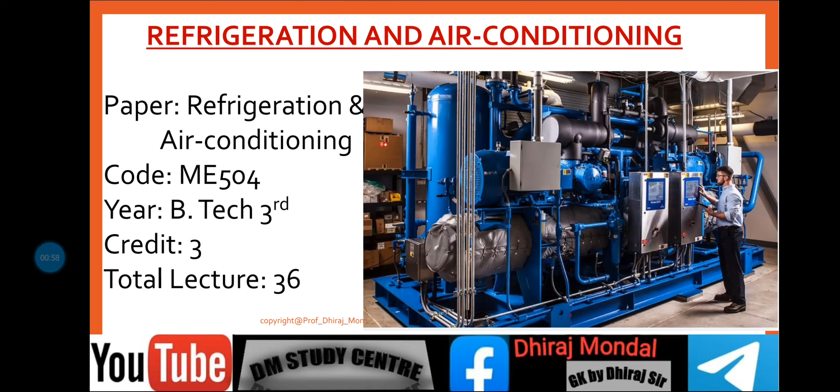This subject, refrigeration and air conditioning, is dedicated for 5th semester third year students, credit 3, lecture 36. Today we will be discussing the numerical on VCRS.

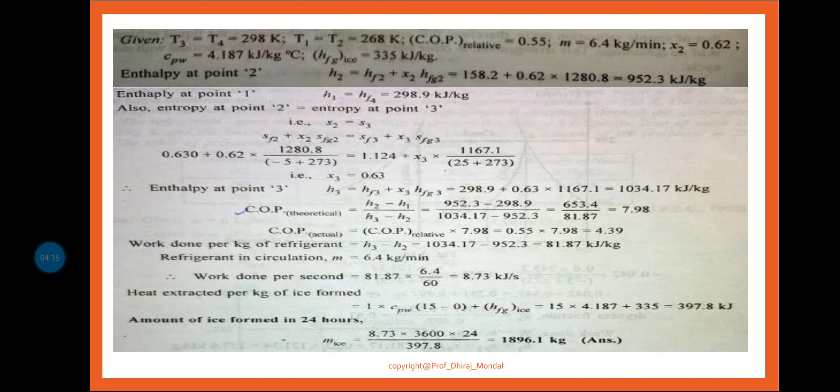Let us start with problem number 3.2. Last class I discussed this problem where we had to calculate the mass flow rate, mass of ice formed in 24 hours, which is 1896.1 kg. If it is not clear, simply see this numerical, it will be clear. First of all, go through the problem.

Determine the theoretical COP for a CO2 machine working between the temperature range of 25 degree and minus 5 degree centigrade. Dryness fraction of the CO2 gas during the suction stroke is 0.6, that is, at the outlet of the evaporator, the dryness fraction is given. The following properties you can see.

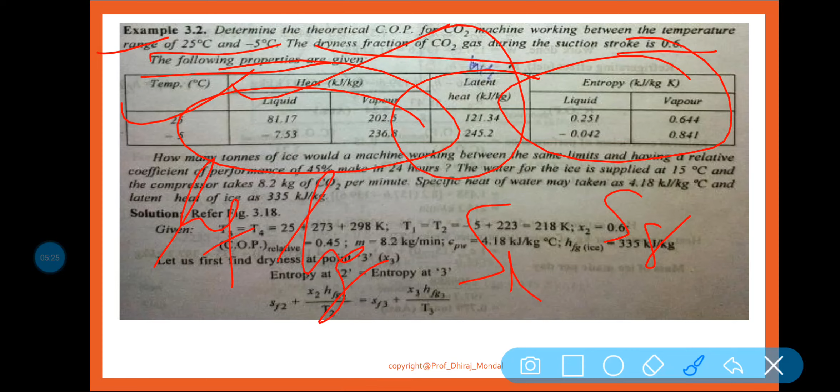So you can easily find out what you need - how many tons of ice would a machine working under the same limit and having a relative coefficient of performance of 45% make in 24 hours.

The water for the ice is supplied at 15 degrees centigrade and the compressor takes 8.2 kg of CO2 per minute. Specific heat of the water may be taken as 4.18 kilojoule per kg Kelvin, and the latent heat of the ice as 335 kilojoule per kg.

So referring to figure 3.18, here the temperature and pressure limits are given, and this point x2 is given, x2 is equal to 0.6. You need to find out x3. Let us see.

First of all, the temperature T3 and T4 are given, because T3 is equal to T4, so it is equal to 298. T1 is equal to T2, x2 is given, relative COP given, mass is given 8.2 kg per minute, CPW means specific heat at constant pressure of water, and enthalpy is given also, enthalpy of the latent heat of the ice is given.

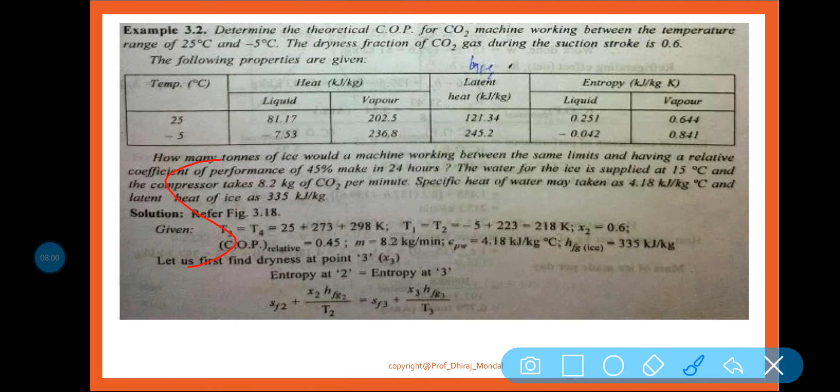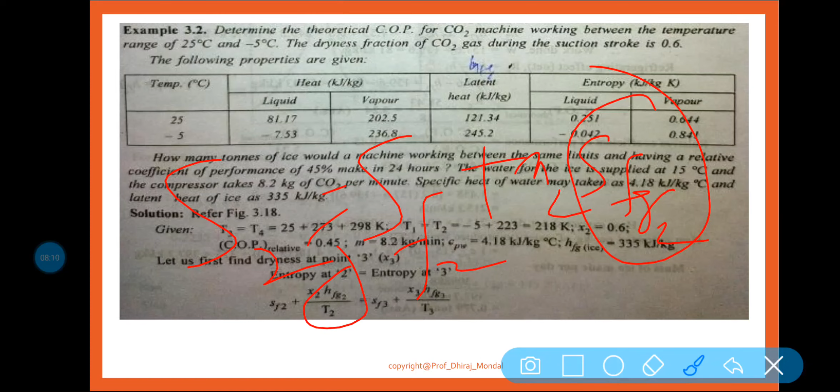Now S2 is equal to what? SF2 plus X2 into SFG2, because we know that S2 is equal to SF2 plus X2 into SFG2. So this SFG2 can be written as HFG2 by temperature T2, and similarly S3 you can write like this.

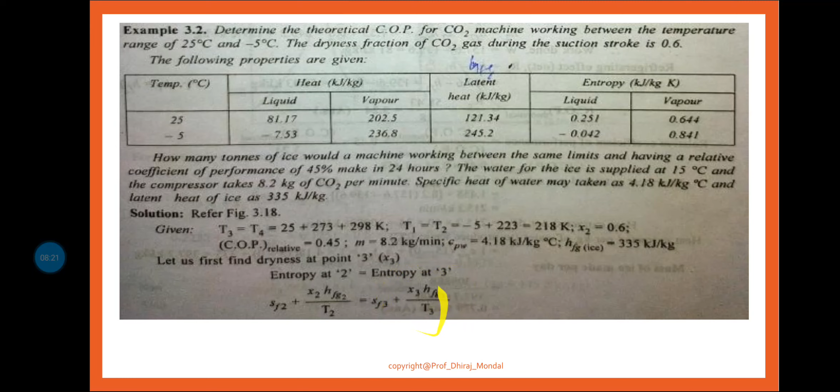So all the values are known, only X3 is unknown here, and the rest you can easily find from the table. Remember, this is your SF3, X2, HFG3, HFG2 and temperature. Only X3 is unknown, the rest is known. So X3 you can find, the dryness fraction is 0.63.

Now what is the work done in this portion? Work done is equal to H3 minus H2 per kg. So H3 is equal to HF3 plus X3 into HFG3, that means up to this mass plus this mass. So put all the values to find H3. HF3 is given in the table, X3 already we have got, HFG3 already given in the table. So from this equation you can easily find H3.

H2, how can we find H2? H2 is equal to HF2, plus X2 into HFG2, like this. So put all the values, you will be getting H2. Now you can easily find the work done. This work done I have got is 81 kilojoule per kg.

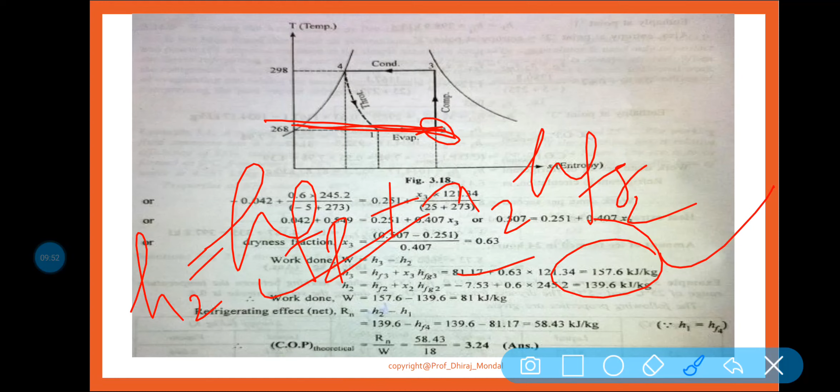Now refrigeration effect is equal to what? This is your refrigeration effect. Rn is equal to H2 minus H1, refrigeration effect per kg. So H2 you know, H1 you know. H1 is equal to HF4, because it is your throttling process, so H1 is equal to HF4. Put all the values, you will be getting the refrigeration effect.

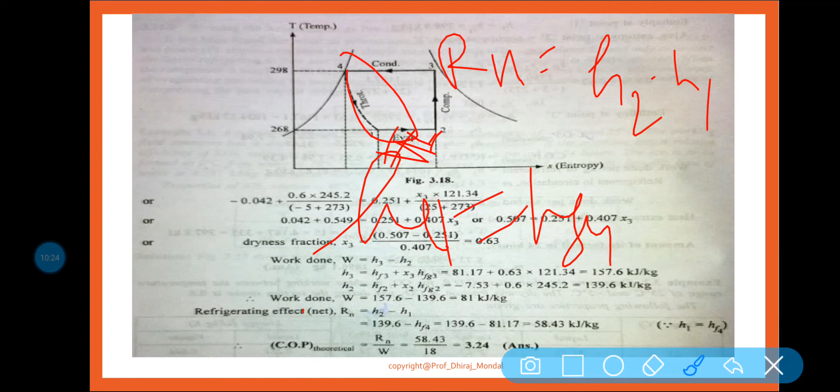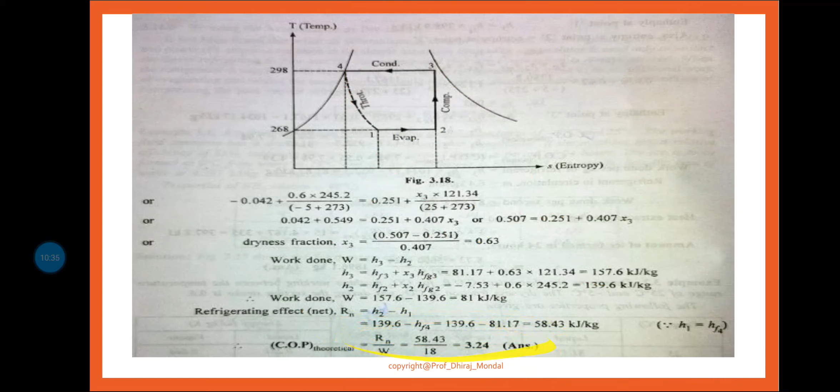So what is the COP? Refrigeration effect by work input. If you put the value, you will get theoretical COP equal to 3.24. Clear? Now we know there is a relation: relative COP is equal to actual COP by theoretical COP.

Relative COP is given as 0.45. Relative COP already I have, theoretical COP already have got, so I can find out the actual COP. So 1.458 is the actual COP.

Next, how to find the heat extracted per minute. COP is equal to refrigeration effect or heat extracted by work done. So heat extracted per minute is equal to actual COP into the work done in the compressor, and it is equal to mass flow rate into enthalpy difference, MCP delta T.

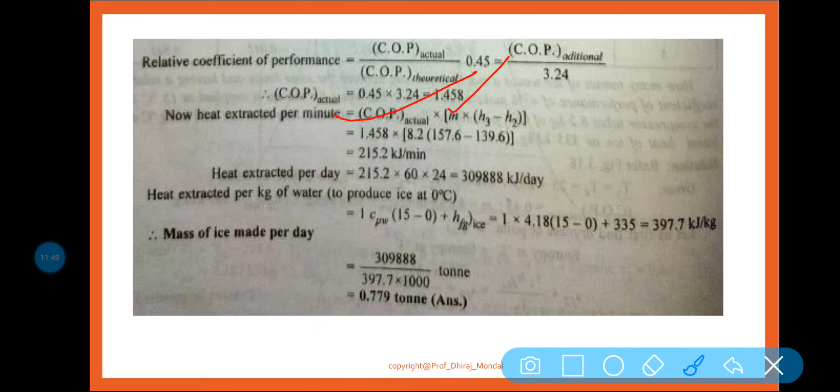Work done is equal to H3 minus H2 into mass. So heat extracted per minute equals actual COP, that is 1.458, into mass flow rate, giving the result in kilojoule per minute, with mass in kg per minute and enthalpy in kilojoule per kg. So ultimately you get the heat extracted per minute, which is 215.2 kilojoule per minute.

Next, heat extracted per day. If you have got per minute, then you can convert it in terms of hour, multiply into 60 into 24, so that you will be getting in terms of per day. So 309,888 kilojoule per day heat extracted per day.

Now you know that from 15 degree centigrade water to 0 degree centigrade ice, if you want to form, then you need to first reduce the sensible heat from 15 to 0, then you need to extract the latent heat, so that it will be converted into ice. So MCP delta T, that means the water is 15 degrees Celsius, MCP delta T plus HFG.

So this is the heat extracted per kg. Heat extracted per kg is 397.7 kilojoule per kg. Now total heat extracted per day is this, and this is your kilojoule per day, this is your kilojoule per kg.

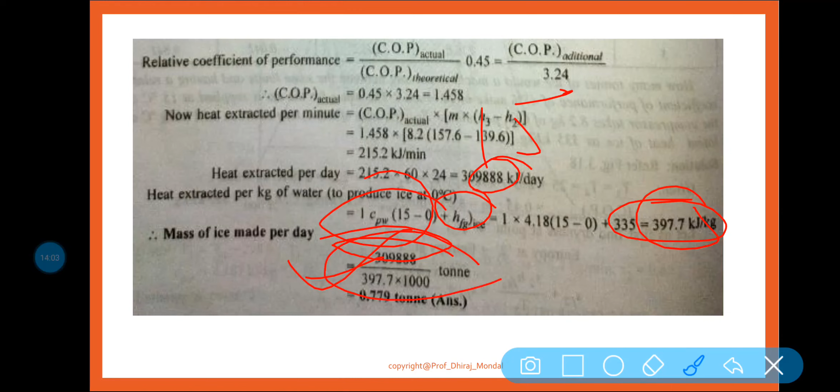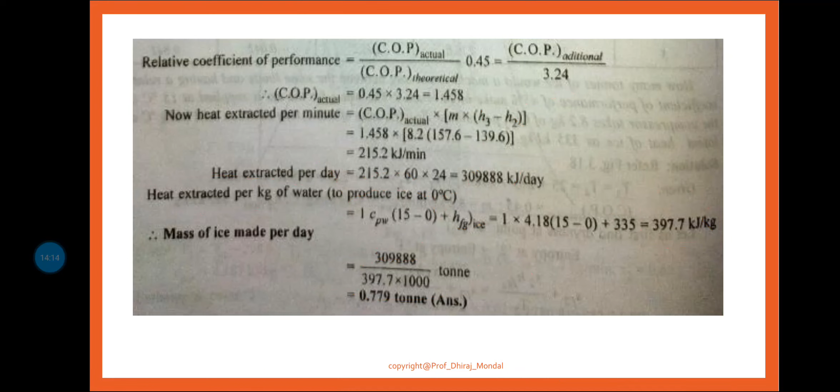Now if you want to make it in terms of ton, then multiply with this, that means divide in terms of ton here. So 397 into 1000 ton, so this is your 0.779 ton mass of ice made per day, because the latent heat or the heat extracted per kg of water is 397.7. Now if you want to convert it in terms of ton, then total what we have got in 24 hours is 309,888 kilojoule per day, and here it is your extracted per kg. So ultimately if you are putting all the units together, you will be getting this much amount of ton. So 0.779 is the correct answer, this is the mass of the ice made per day.

In case if you want to calculate one more problem, let us see this problem 3.3. This problem came in the UPSC 1992. Very important problem. A refrigeration system, you can see, one minute.

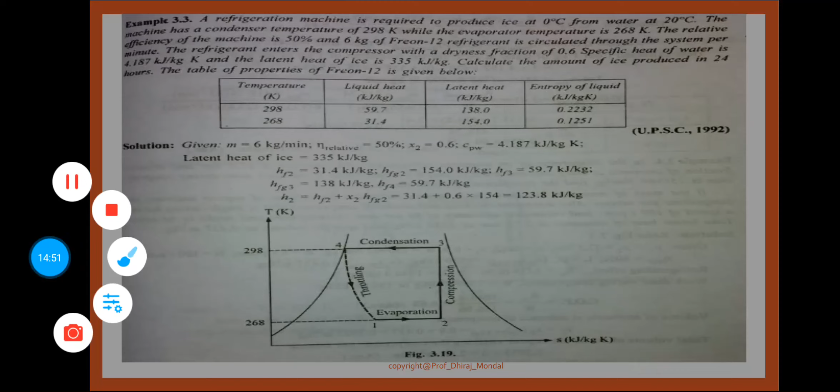Refrigeration machine is required to produce ice at 0 degree centigrade from water at 20 degree centigrade. The machine has a condenser temperature of 298 Kelvin while the evaporator temperature is 268 Kelvin. The relative efficiency of the machine is 50%.

6 kg of Freon 12 refrigerant is circulated through the system per minute. The refrigerant enters the compressor with a dryness fraction of 0.6. Specific heat of water is 4.187 kJ per kg Kelvin and the latent heat of the ice is 335 kilojoule per kg. Calculate the amount of ice produced in 24 hours.

Same problem, same type of problem. So why I am discussing this, because these type of problems you will see, and if you continuously practice the problem, you will be able to answer the question. Now the temperature column is given. Now the mass flow rate is also given, 6 kg per minute. Relative COP also given, x2 given. Now you need to find out the amount of ice produced in 24 hours.

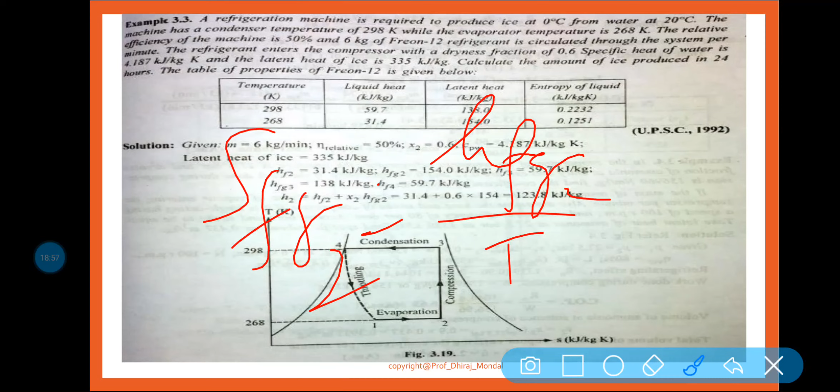S2 is equal to S3. So put the value: SF2 plus X2 into SFG2 is equal to SF3 plus X3 into SFG3. Now this SFG2 can be written as HFG2 by T.

So this is how we can easily find out H3. You can see X3, this is the equation. I hope this equation is clear. Now put in all the values, we will be getting X3. X3 is equal to 0.53.

Clear? So I can find out H3 easily. Now, once I have got H3, and H1 is equal to H4, that is your throttling process. This is given in table 59.7. So put in all the values.

That means theoretical COP is equal to refrigeration effect by work input. So what is theoretical COP? Refrigeration effect by work. Refrigeration effect means H2 minus H1, and work input is equal to H3 minus H2. Am I right? Same process. So find out, put the values of all the enthalpy, you will be getting theoretical COP is equal to 6.82.

Now come to the actual COP. How can we calculate the actual COP? Actual COP is equal to relative COP into theoretical COP. So 0.5 is the relative COP and theoretical COP is equal to 6.82. After calculation, the actual COP is equal to 0.5 into 6.82, means 3.41. So 3.41 is the actual COP.

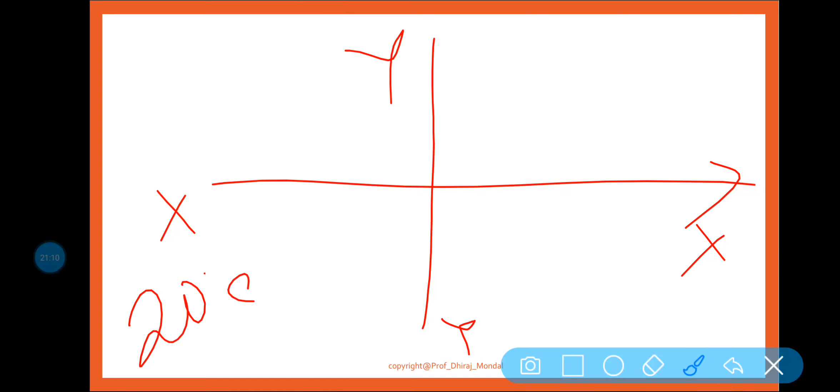Let us consider this is your x-axis, this is your y-axis. Now let us consider we are having 20 degree centigrade water. So initially the temperature, this is your temperature-entropy diagram, you can see. So let us consider the temperature is here, 20 degree centigrade.

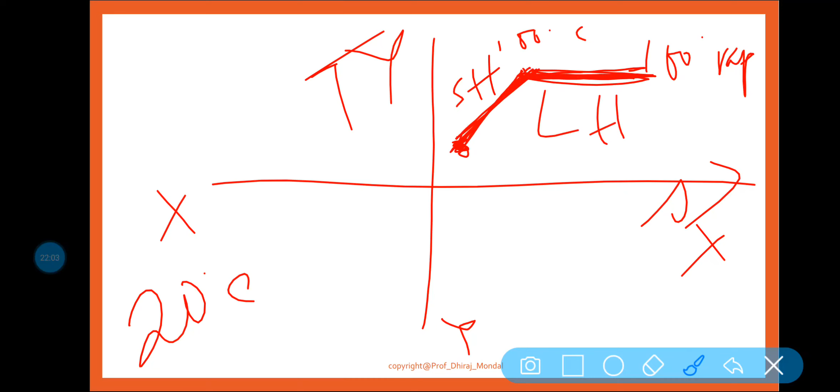Now what happens: this 20 degree centigrade water, if I am heating it up, it will take some sensible heat and reach up to 100 degree centigrade water. Then again, if I am heating up that water, it will be converted into 100 degree centigrade vapor by taking latent heat only. So in latent heat, only the phase is changing, no pressure, no temperature is changing. But in sensible heat, the temperature rises from 20 to 100, but there is no change of phase - it remains liquid at both 20 degree centigrade and 100 degree centigrade.

But if I keep heating this water, it will try to change its phase, meaning it will make vapor. So it will first become 100 degree centigrade vapor by taking latent heat. Latent heat is that type of heat where heat is extracted or given to the substance, but the temperature remains unchanged while the phase is changing. This is the definition of latent heat. But in case of sensible heat, the temperature is changing but the phase is not changing.

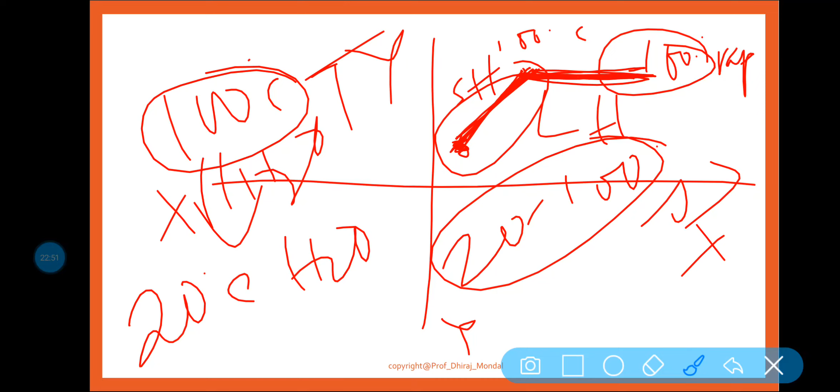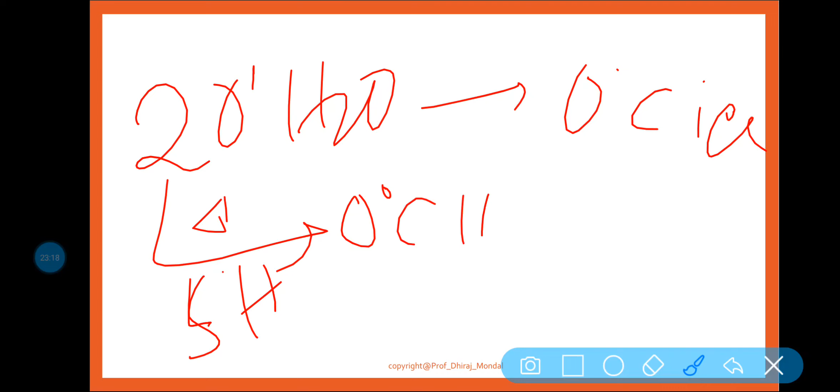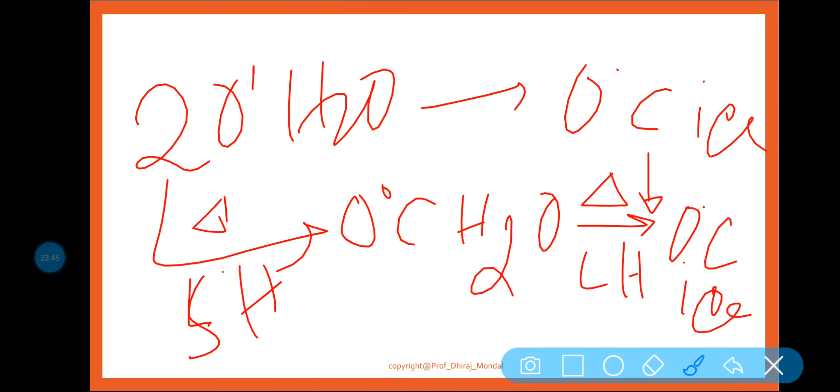So what happens if I want to get 20 degree centigrade water to 0 degree centigrade ice? First we need to extract some heat from this water, and by taking sensible heat you will be getting 0 degree centigrade water. Again, if I am extracting heat, then it will, by taking latent heat, be produced as 0 degree centigrade ice. So this is how we can convert 20 degree centigrade water to 0 degree centigrade ice.

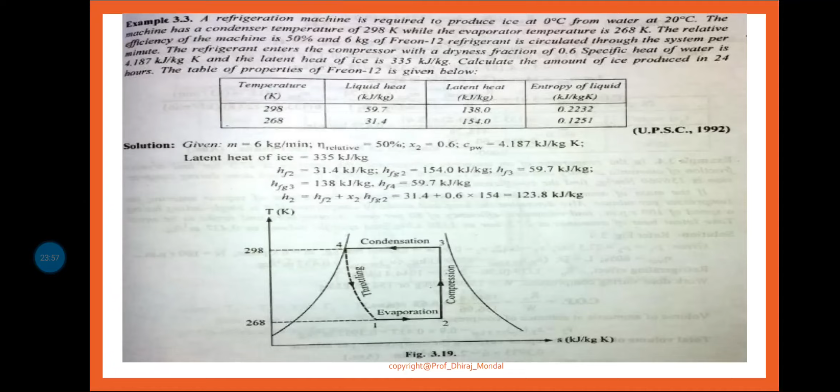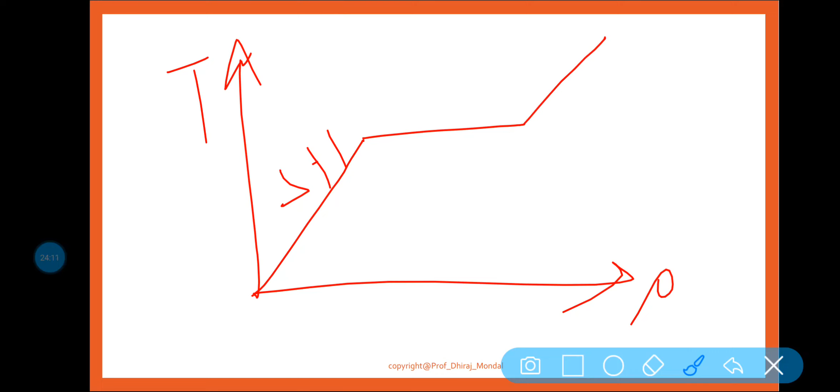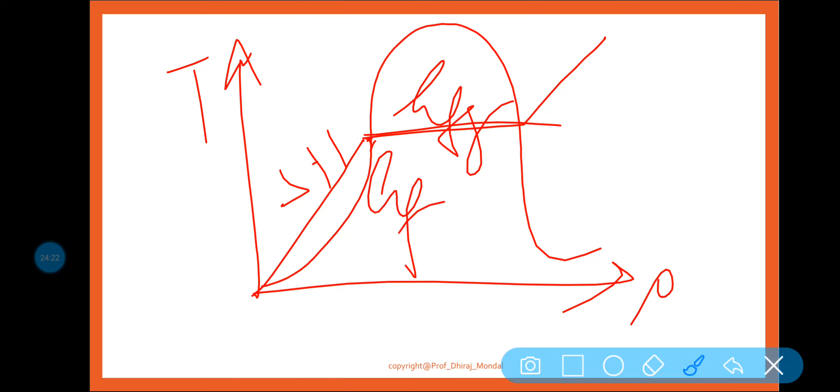Clear? Now first you need to know, basically you can see here - again I am writing here, you can see. So what happens if I am plotting this TS diagram: first it takes some sensible heat, then latent heat, then superheating, like this. This is your TS diagram. So this is your latent heat region HFG, this is your saturation liquid line, this is your saturated vapor line HG.

Here we need to calculate the mass of ice, the amount of mass formed in 24 hours. So first, heat extracted per kg of water at 20 degree centigrade for the formation of 1 kg of ice at 0 degree centigrade: 1 into 4.187, that is your mCp delta T, so m is equal to 1 per kg.

4.187 is the CPW, that means specific heat of the water at constant pressure. Final temperature 20, or initial temperature, you can take it in terms of Kelvin also, but it is your temperature difference, so no matter. So ultimately this, and this latent heat is this. Latent heat is equal to 335 kilojoule per kg.

So ultimately the answer is coming 418.74 kilojoule per kg. Now let us consider the mass of ice, m ice is equal to mass of the ice formed in kg per minute. We are considering kg per minute.

Actual COP is equal to 3.41, and refrigeration effect actual is equal to what? Mass of ice into refrigeration effect. What is effect? The how much amount of heat extracted per kg of water to form ice at 0 degree centigrade.

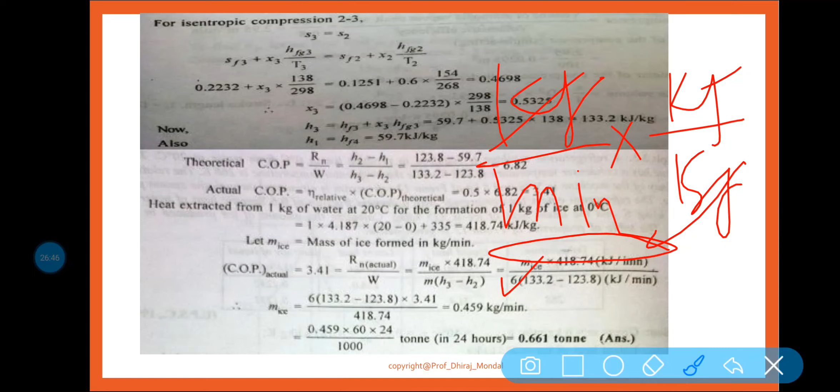Clear? Now by work done, refrigeration effect by work done. So work done is equal to mass flow rate into the enthalpy difference. So mass flow rate is your 6, it is given, and enthalpy difference you know.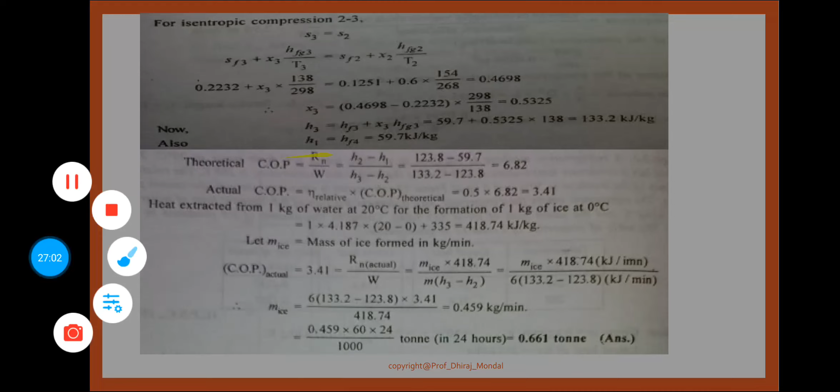So can I find out the, you can see here 6 is given, 6 kg per minute. This is the mass which is given here. So that is why I have written here: mass of ice into 418.74 kilojoule per minute by 6 into 133.2 minus 123.8 kilojoule per minute.

Kilojoule per minute cancel out. Okay, so what happened here? Mass of ice is equal to this. So mass of ice is equal to this kilojoule per minute. Okay, so I hope it is clear.

So basically if it is cancelled out, then it is your COP whatever. Now I need to find out the mass of ice. So mass of ice is equal to this figure by this figure. So ultimately this is the figure, 0.459 kg per minute, or you can convert it in terms of ton.

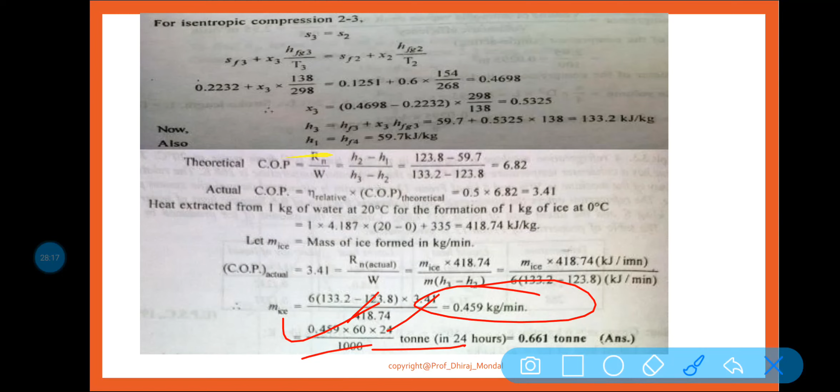So 0.459 into 60, then it will come into hour, then 24 by 1000. So this much ton in 24. So 0.661 ton of mass of ice will be produced in 24 hours, this type of phenomena is taking place. So I hope it is clear.

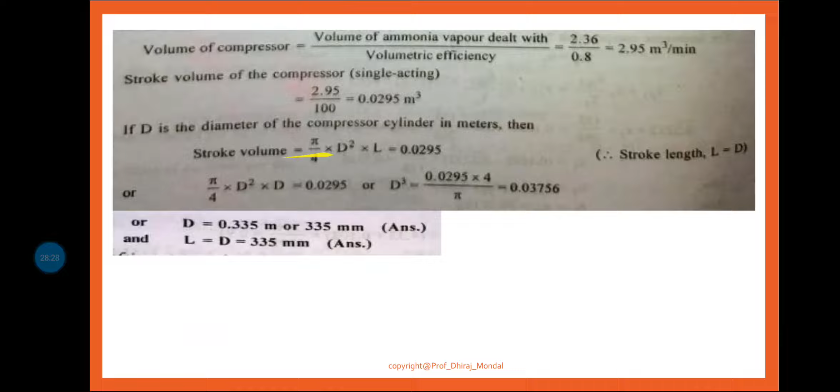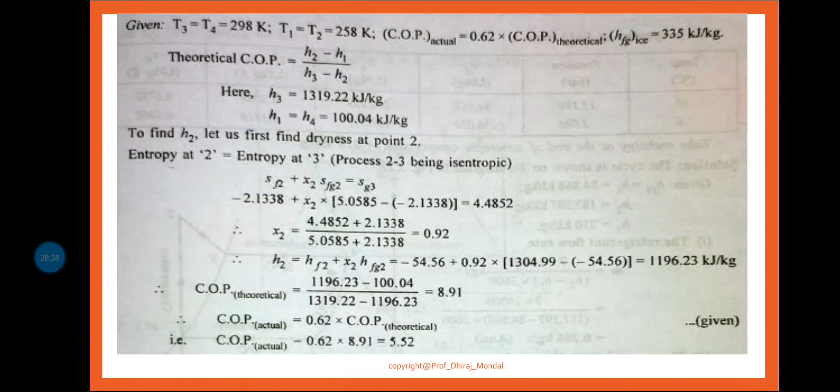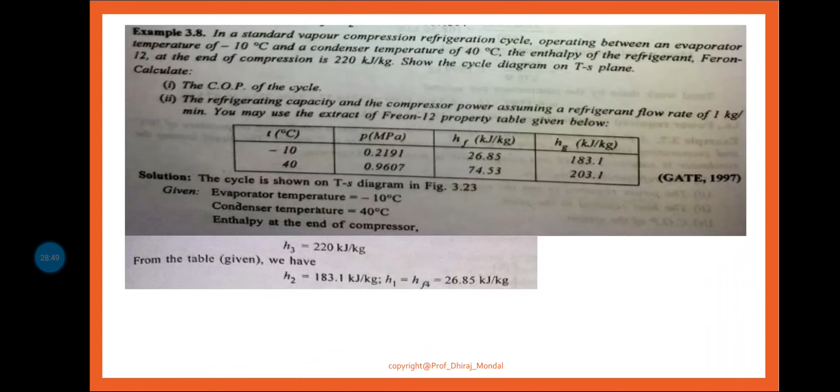Okay, next, this is your homework, say 3.4, you can solve it in your home. This is again another homework, 3.5, solve it in your home. Another homework is given to you, 3.6, very important, solve it. And this is the assignment, you can send me to my email ID. Okay, then 3.7 again a very important problem, then 3.8 again a very important problem. Okay, so these are the problems. 3.9 try to solve. Okay, then your highlight.

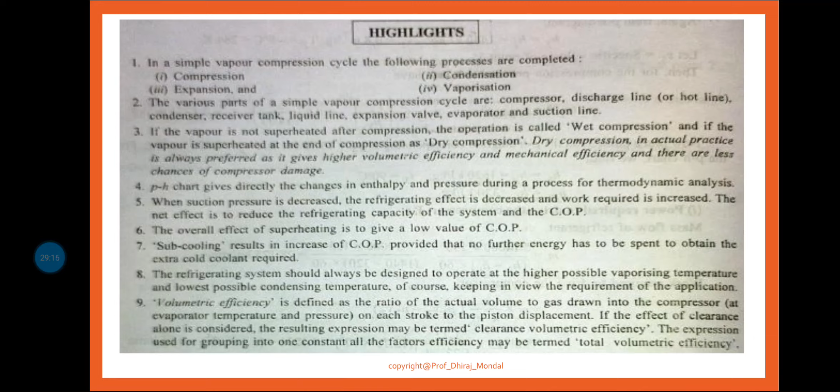So basically maybe one more class will be taken, and this is basically based on the numerical, or next your vapor absorption refrigeration cycle, we will be discussing all this. So today up to this, in case, and you have to submit the assignment. Okay, these are the questions which you have to solve.